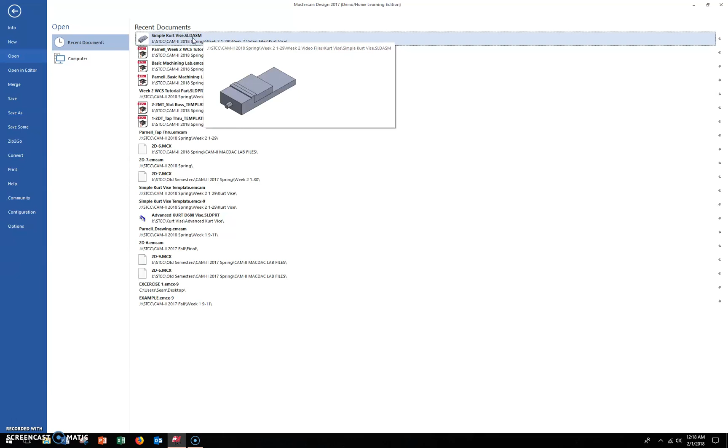I'm going to start by opening our fixturing device, which is going to be a simple Kurt vise. It is a SolidWorks assembly consisting of two individual parts. By opening that Kurt vise up in Mastercam, you'll notice that two levels were created by default, one for each piece. The very first thing we're going to do is create our separate level for just both pieces on one level. We don't want to have them separated.

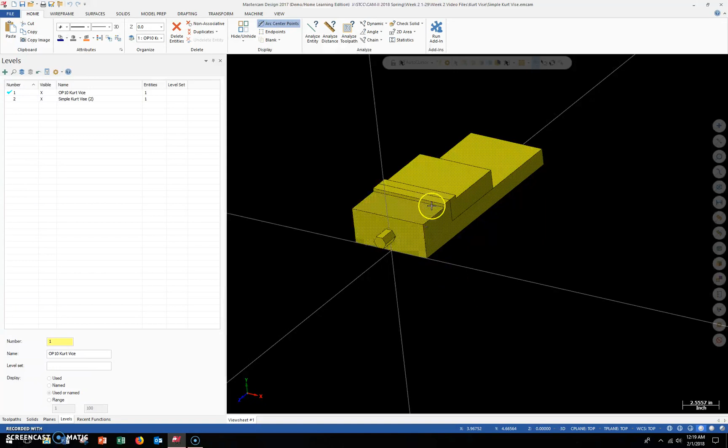I'm going to create Op 10 Kurt vise, and we'll basically move the second piece onto number 1 here, and then delete the second one. So again, the way we're going to move levels is you can highlight both pieces with a tick box or individually click them. I'm going to right click and go to change level.

I want to move both pieces. I don't want to copy. I want to move both pieces to the active layer, which is number 1. After clicking OK, you'll notice that both entities now exist on level 1. That's exactly what we want. And I'm going to go ahead and right click on number 2, go to purge empty, and I just want to delete the selected one. Okay, so now we only have our one level for the vise.

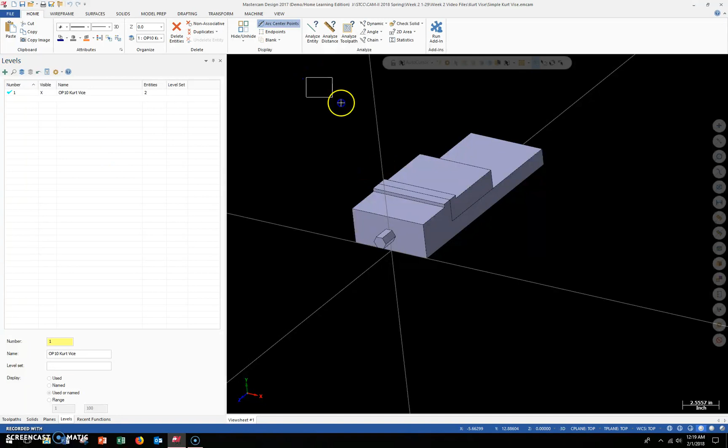I'm also going to go ahead and select these vise pieces again, and I'm going to change the solid color to a different unique color just to keep it separate from the part that we'll bring in later. I'm going to use magenta for this case. But you may use whatever you'd like in your own practice.

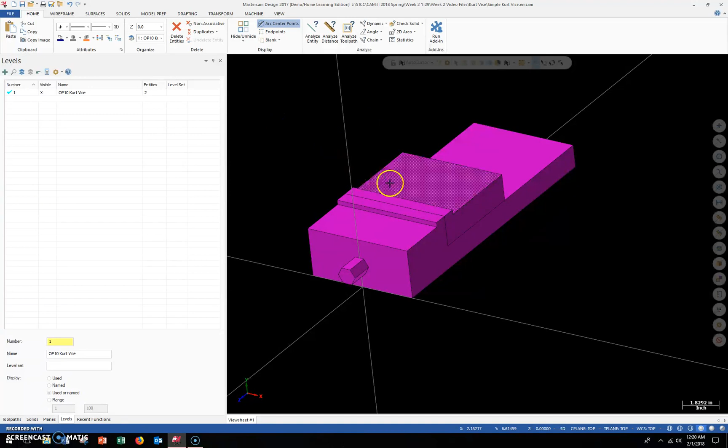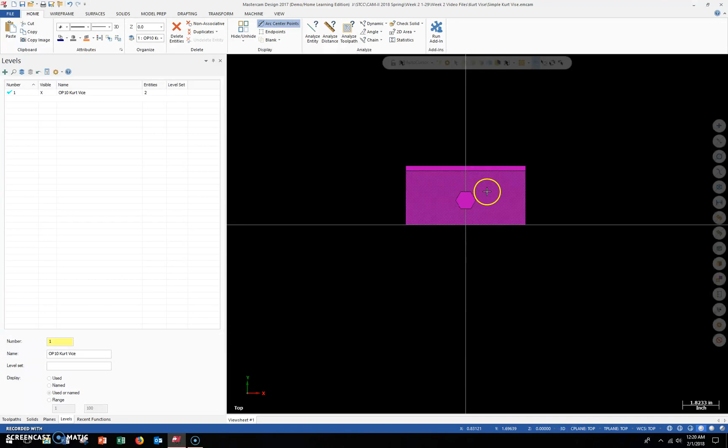So now that we have the fixturing device in place and we have the level selected, we now have to look at the orientation of the vise. The easiest way to check that would be to right click and look at our top view and kind of see where we are. So you'll notice that instead of looking at the top of the vise, we're kind of looking at it from the front and straight on.

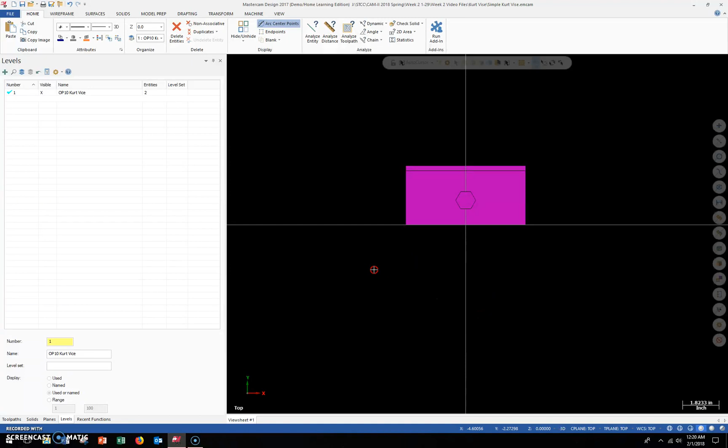And what that tells me is the orientation to the default plane is 90 degrees off from where it should be. We want to rotate this 90 degrees, in this case in the y-axis, in order to get the vise oriented to match up with the top view. Okay. You can do that a couple different ways.

My personal preference is to go into the transform. And I like to use dynamic, which basically gives you a visual representation of how you're orienting the part. I find it's really easy to understand after you use it a couple of times. So we're going to start with that. I'm going to click on dynamic.

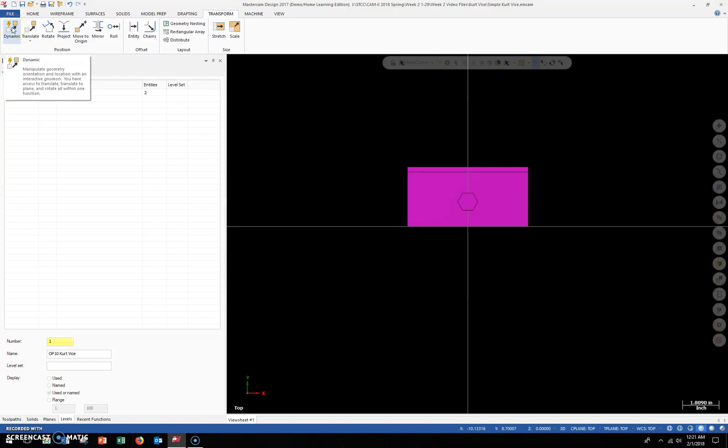I'm going to box pick my vise, or also again, you can individually click the two pieces if you like. After you select those two parts, I'm going to end the selection. And you're going to see that we have a gnomon show up here. It's basically a cursor that we're going to drop down as an anchor point, and then we're going to choose the direction that we want to rotate the part in.

Right now, we're only concerned with the actual rotation of the part. We're not really too concerned about where it is in space. So I'm going to click anywhere in the black box area for now, just to make it clear and easy to see and understand. And again, you'll notice that we can select each one of these segments, and each of these segments or individual lines represents a directional move.

So the Y, X, and Z axes are straight line moves. Okay, you don't change the orientation at all. You just move in space up and down, left or right. These axes here actually allow you to rotate the part position.

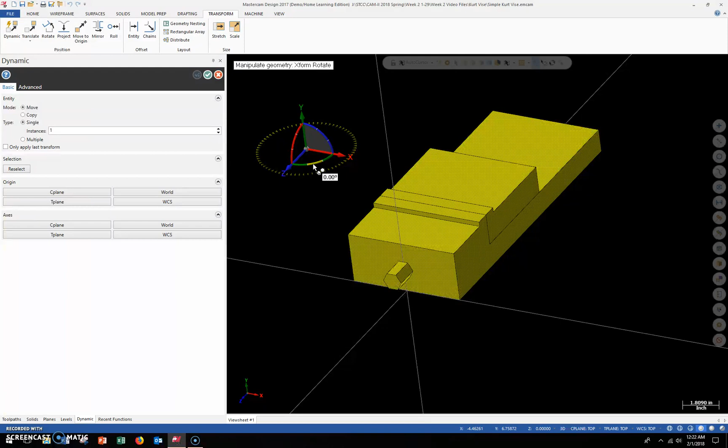So in our case, our front of the vise is basically 90 degrees off kilter to where we'd like it. We want to rotate the part up in this direction, which is basically this selection here. You see how the compass kind of shows you rotating around.

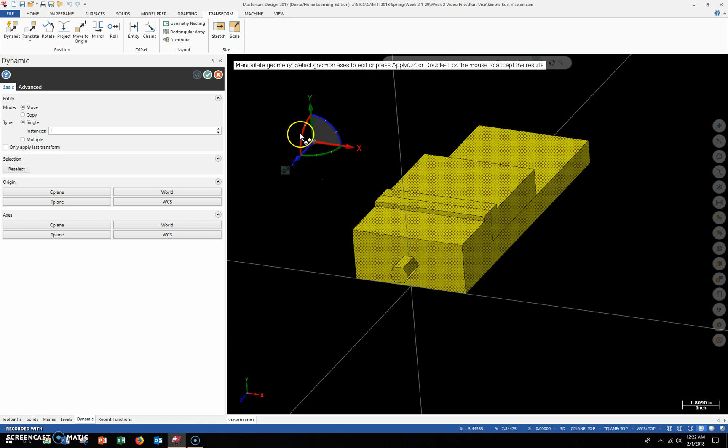What we're going to do is click on this and get a preview so we can see how the part's rotating. You can see that we're moving in the right direction, right? The top of the part is moving in the correct axis.

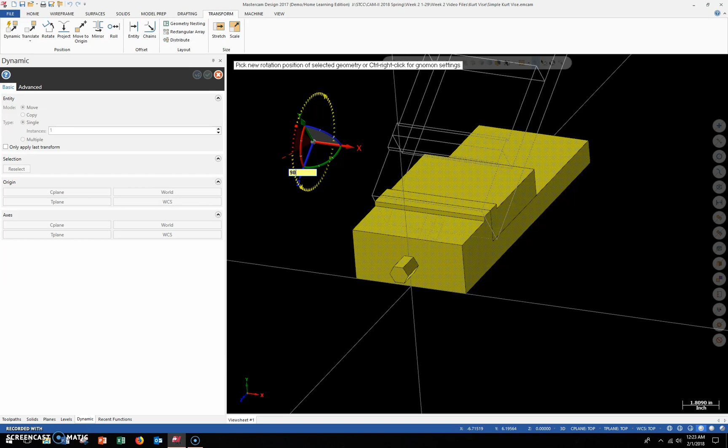What I'm going to do right now is just type in 90 degrees without hitting anything else. Just type in 90, and you'll notice that the text goes in the box. The first enter key that you hit after selecting your input is going to show you a preview. So you'll see that we locked in at 90 degrees.

If I go and right click top after this, that's how we're going to check it. The second enter key is actually what locks it in position. So the first enter key shows you the preview, and the second enter key gives you the command.

And then I'm going to go ahead and make sure that move is selected. We don't want to copy. This is by default, so this is okay. And we're going to hit OK on this.

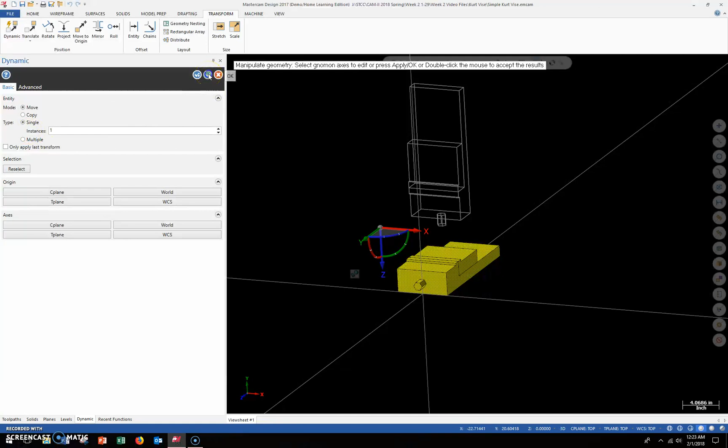So now you'll see that we moved, or rotated the part around the axis. And when I right click and go to top, my top plane, you'll notice that our vise is now in the proper alignment, so that the top plane and the top of the vise are now in line.

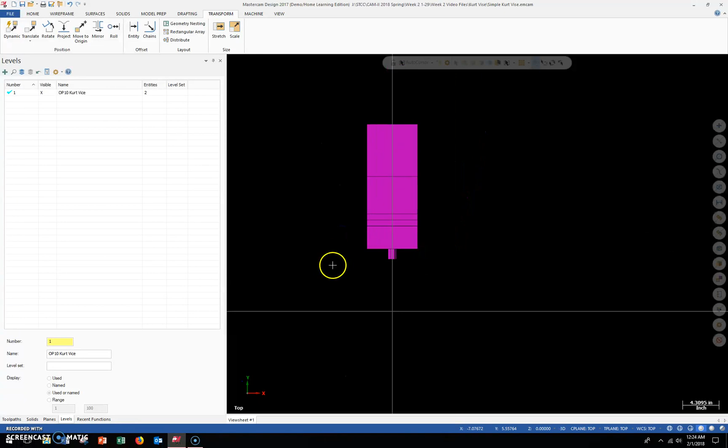I'm going to do that one more time. I'm just going to undo real quick and try to do it one more time just so you get a good idea how to do it. So dynamic, pick the box and select the pieces you wish to rotate.

And for the selection, I'm going to left click the gnomon. I'm going to select the axis that I want to rotate on, which in this case is between the Y and the Z. I'm going to type in 90 degrees once.

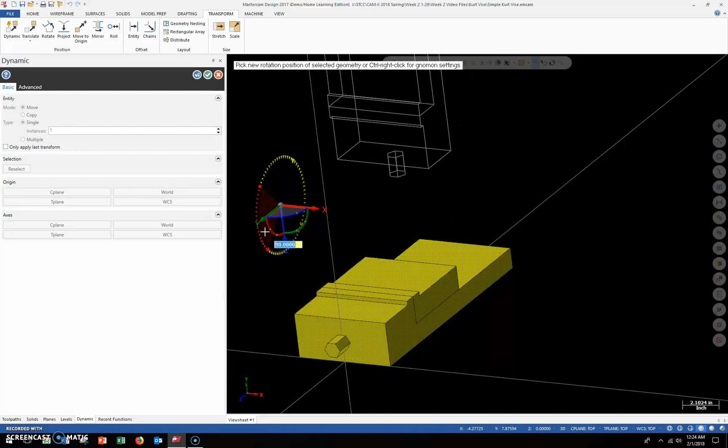I'm going to hit enter, then hit enter again to lock that in position, and then click OK. So now when I'm looking at my top view, we are in line with the base top plane that is default in Mastercam when you first open this up.

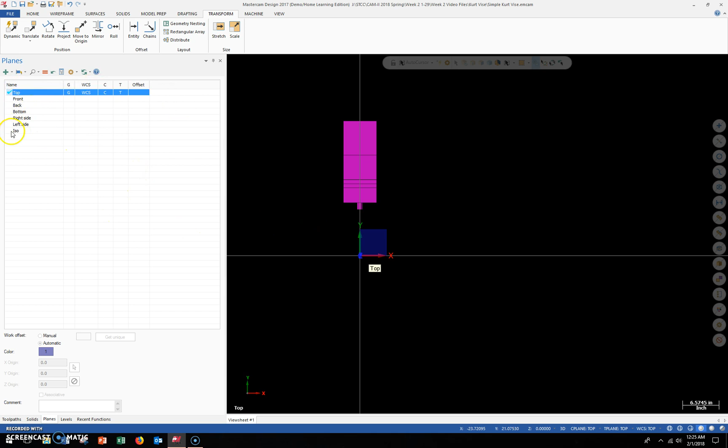Okay, we're not going to use these planes for actual manufacturing process, but these are kind of reference points, and this is a good place to start.

So now that we have oriented the vise properly, what I'm now going to do is take the home position that Mastercam has by default, and place the vise in that position using a translate. What I'd like to do is have the fixed end of the vise, meaning the part of the vise that's not going to move.

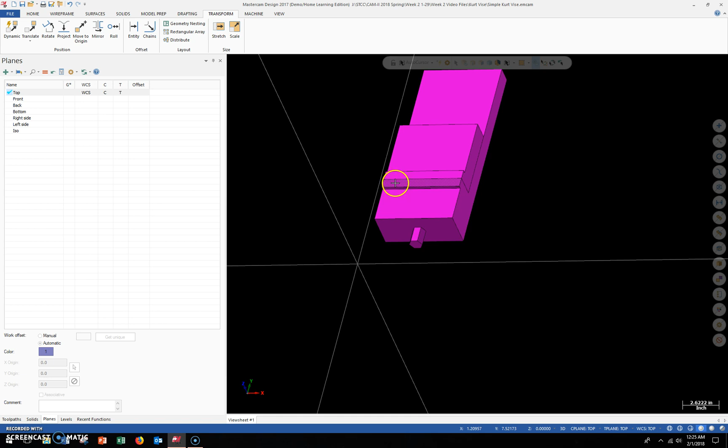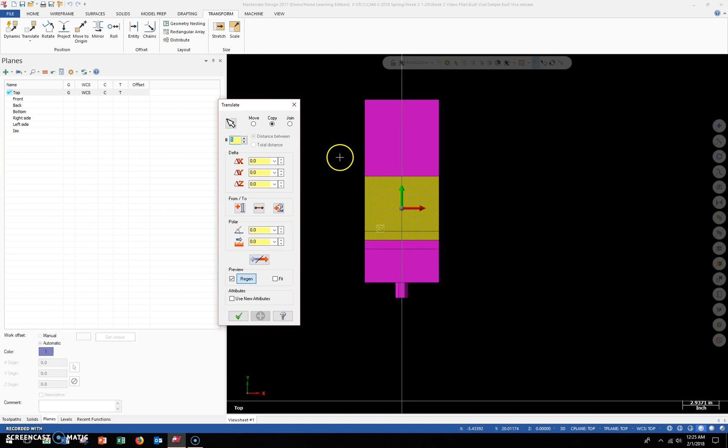Again, this is going to move up and down depending on the width of the part. This corner here is always going to be static. So just as a quick point of reference, I'm going to move my back jaw away from the front of the fixed jaw real quick, just so it's easier for you to see exactly what we're going to be doing here.

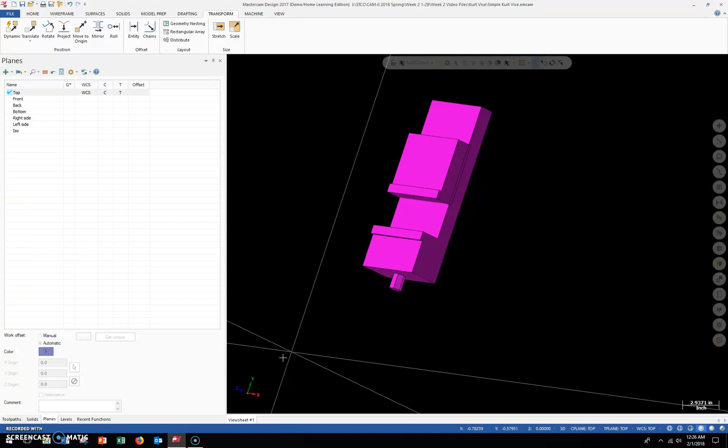So this is the fixed point right here. We're going to use this snap point to locate the fixed jaw at this 0 position here. And again, I am getting this position or this cursor here by using the F9 key. That's turning on the axis for top and just showing you where that is. This point here will be available for us to snap to.

So when I'm doing linear moves, I like to use the regular translate command. And the reason being is that it is a very simple tool and allows you to use existing geometry to move parts in space.

So I'm going to select my 2 pieces as usual. I'm going to hit end selection. And I'm going to ensure that move is selected. I don't want to copy. I want to move the workpiece.

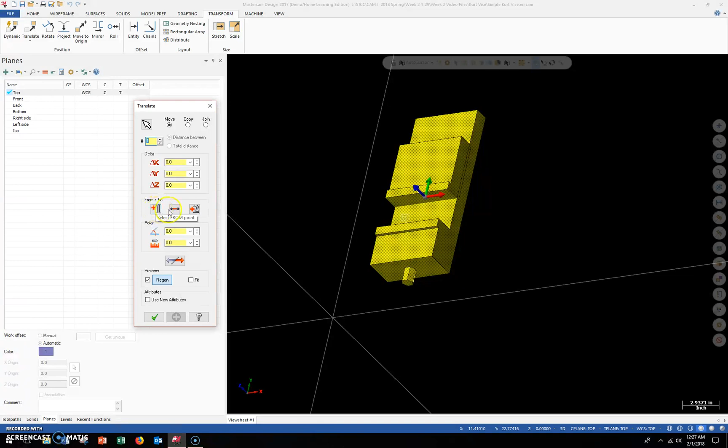And what I'm going to use for a tool in this dialog box is the from and to options. So basically what this allows you to do is pick 2 points. The +1 button, your first point, you click on the part where you want the point to be. So basically when you click on +1, I'm going to select the front edge of the fixed, the bottom left-hand corner there, basically, of the fixed edge.

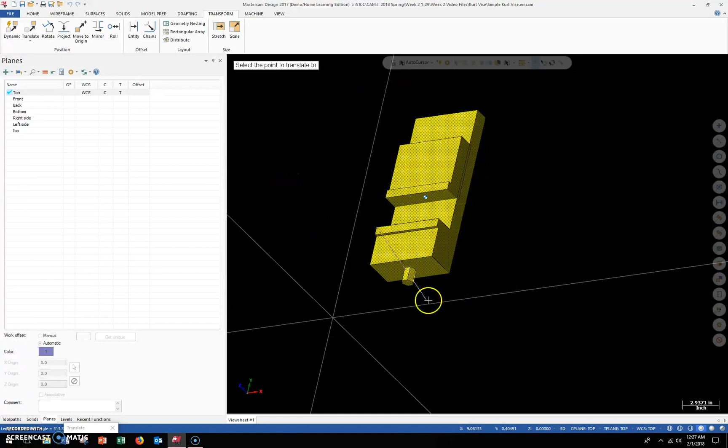What that does is give me an anchor point, so that I'm going to go and choose my 0, 0 point here by snapping to that, and it's going to move everything over and basically put this point on top of this point. And you'll see that in a second here.

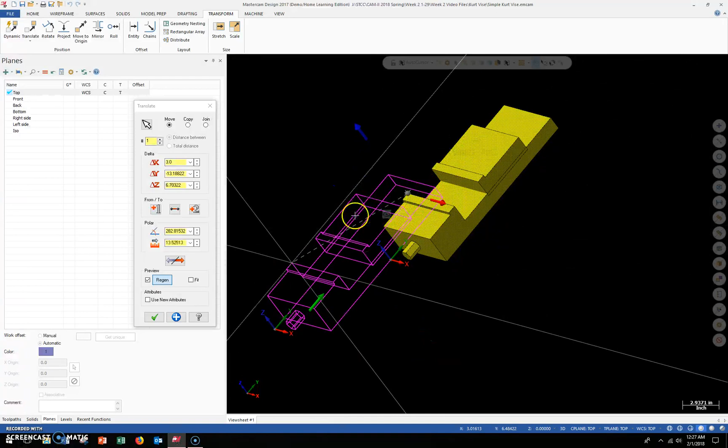So the purple is my preview. Okay, you'll notice that I'm moving from point to point here. When I hit apply, you'll see that the move happens, and it's just the red box, the red outline is showing you where the old position was.

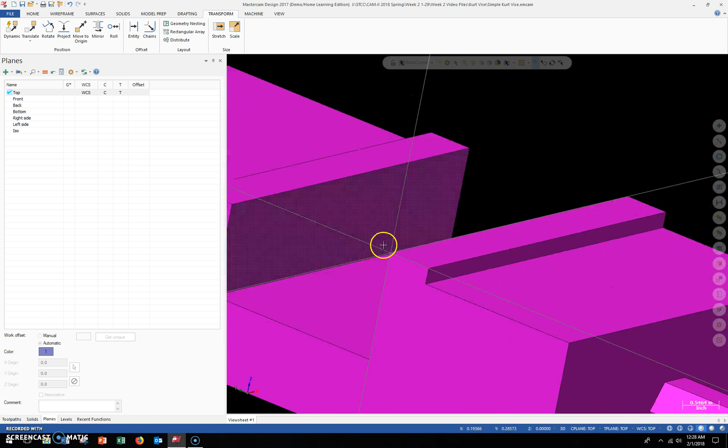By hitting end selection and OK, now we're actually exiting the command and the move is locked in place. So you'll notice that this is line on line now, and we'll be using this a lot.

So I'm going to go back and show you that one more time. Let me hit undo here. Actually, I just noticed I kind of screwed this up too, but I can fix that later. So we're going to undo this and just practice the translate one more time.

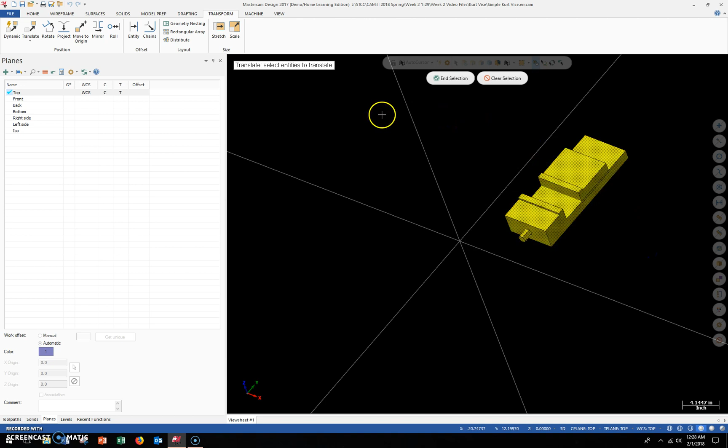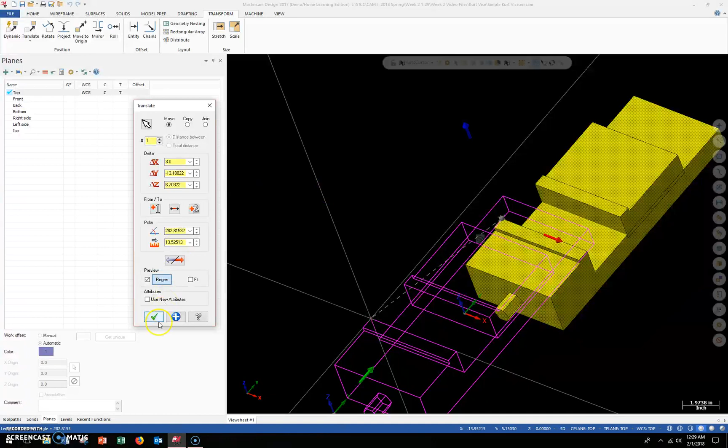Again, it's under Transform, Translate. We're going to do a pick box and make sure both pieces are selected. I'm going to end the selection, then use my from and to, starting on my +1 button here. I'm going to select the point on the part that I want to be the 00 position, and then select the snap point on 000. And we're going to hit OK on that.

So that's pretty much how I transform and translate. I'll use dynamic to rotate pieces when I have to, and I will use translate to move things in the X, Y, and Z positions dimensionally.

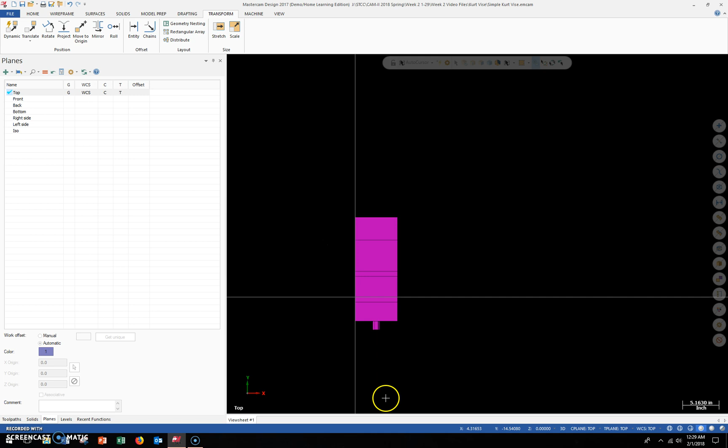So now that we have done that, what we're going to do next is bring in the part that we're going to be manufacturing and basically do the same alignment process that we just did on the vise. So our simple part that we're going to be manufacturing, I'm going to merge into the file.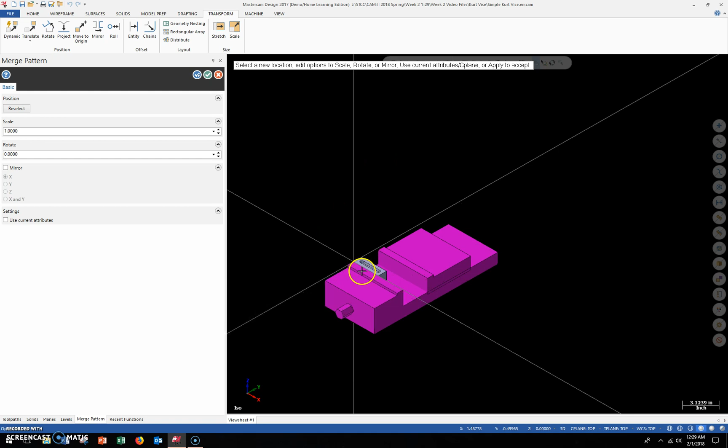The file is called, let's see, here we go - week 2 WCS tutorial, it's going to be a square block. You'll notice that it comes in kind of on top of the vise, and that's okay because we're going to turn the vise off while we're working on it for now. I'm going to hit OK.

And I'm going to go into our levels. Interestingly enough, something didn't come in properly here. Let's go ahead and make a new level for the part. This level is going to be number 5 - I like to leave some space in between. And this level is going to be op 10 part.

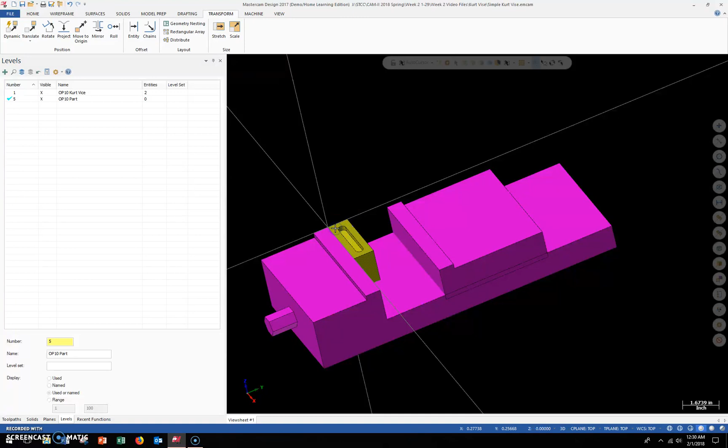Now what I want to do is highlight the solid. I'm going to right click, change level, and we're going to go ahead and move this part to the op 10 part. I should see a 1 entity come up over here if this works correctly. There we go - so there was some kind of glitch there. It wasn't showing that first entity.

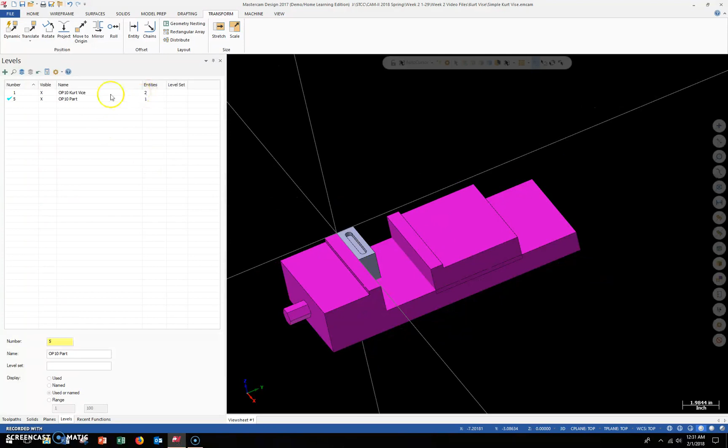And now what we're going to do is just turn the vise off and focus on the part for now. For this instance, we're going to say that the top of the part is the surface that has this nice circular pocket on top.

And if we go to do a top view, you'll notice that we have the same kind of issue that the vise had, right? We're looking at it from the front when we want the top. So what we're going to do is a dynamic rotate to similarly align those two planes together. So I'm going to go back to dynamic.

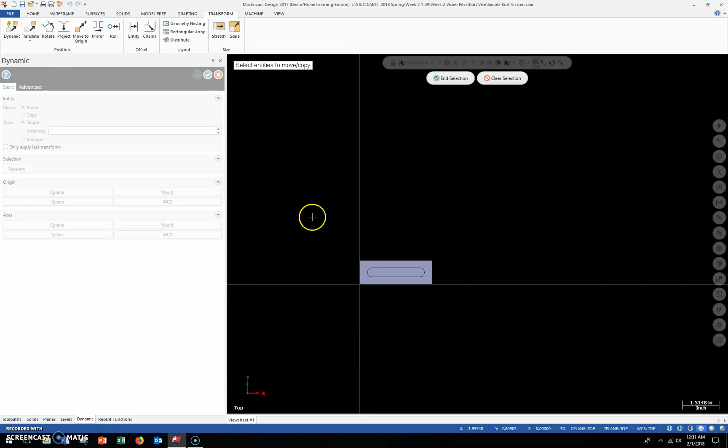I'm going to highlight the part, then end the selection. I'm going to go a little isometric just so I can see what I'm selecting here. Let's put that in space again. We're going to rotate around the same axis we used for the vise.

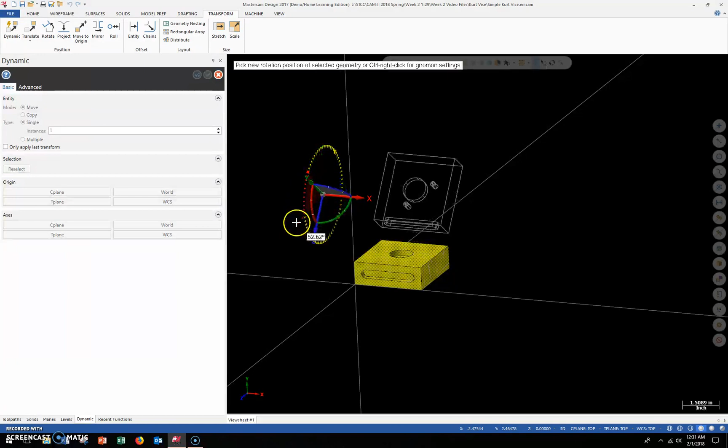So again, I'm going to click on one of these 3 radials. I'm going to type in 90 to swing my part up - okay, that's the direction I want to go. I'm going to hit enter one more time to confirm the command, and I'm going to go ahead and hit OK.

And again, by right-clicking and going to top, you'll now see that we have the proper orientation.

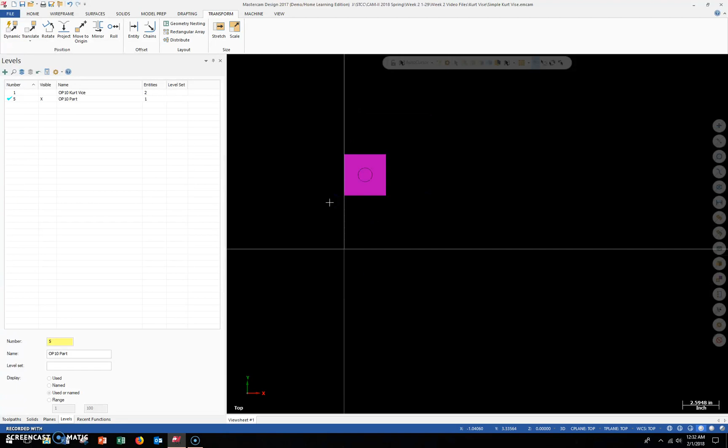Also similar to what we did with the vise, I also want to give this its own color. I'm going to select it and right-click, and go to the solid color change button here. I'm going to go ahead and make this - we'll make this blue for now. You can pick anything you want in regards to that.

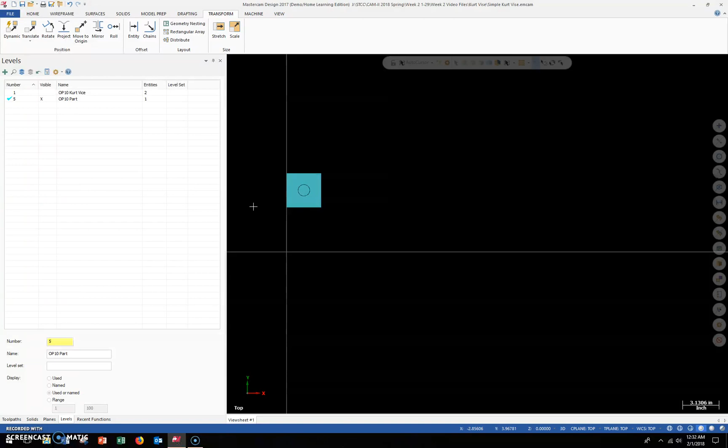That's going to be it for the first video. In the next video I create, we're going to look at placing the part into the fixture, and then we're also going to be setting up these 3 other planes that we need in order to machine all 3 of these features. So we're going to have a top, a front, and a bottom plane to play with. So thank you very much, and I'll see you in part 2.